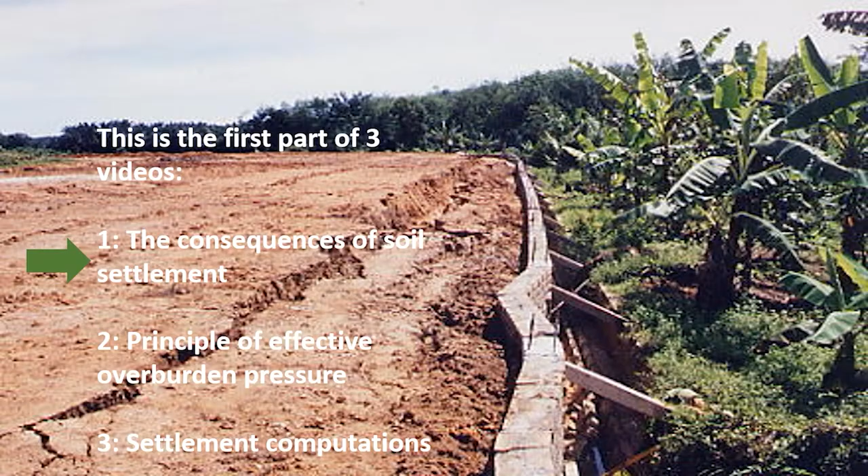This is the first part of a three-part video on consolidation and settlement. The first part will be the consequences of soil settlement. The topic for this time will be consolidation and settlement and its effect on constructed facilities.

Okay, this is how consolidation could affect constructed facilities. On top, I think you have seen this before. You can see this gap here from the wall. This is the grass here. It was originally at this level, right? The grass was here. Now it has already dropped down about 200 mm below. So that is because of the settlement, and then it exposed this portion here.

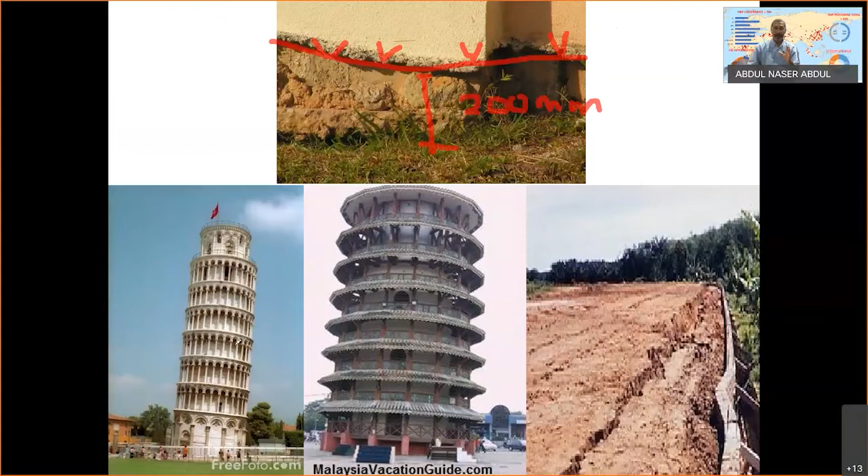And of course, this is a very famous building here. Everyone in soil or geotechnical engineering would know this. But interestingly, this Leaning Tower of Pisa, we in Malaysia also have one version of the leaning tower, which is this one here. This is in the state of Perak, actually in Teluk Intan. It has now also become a tourist attraction because of a similar leaning tower like the Pisa in Italy.

Also, if you look at the photo on the right, you can see the settlement. In this case, the base settlement takes place that caused this retaining wall here to collapse. You see this crack, and it collapsed down because of the settlement below. So these are some issues of how consolidation and settlement can affect our facilities, our buildings, our infrastructure, and so on. Menara Condong.

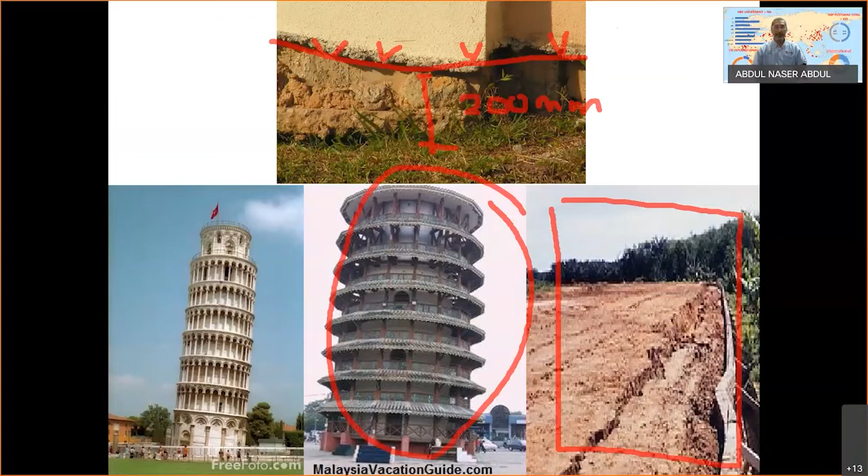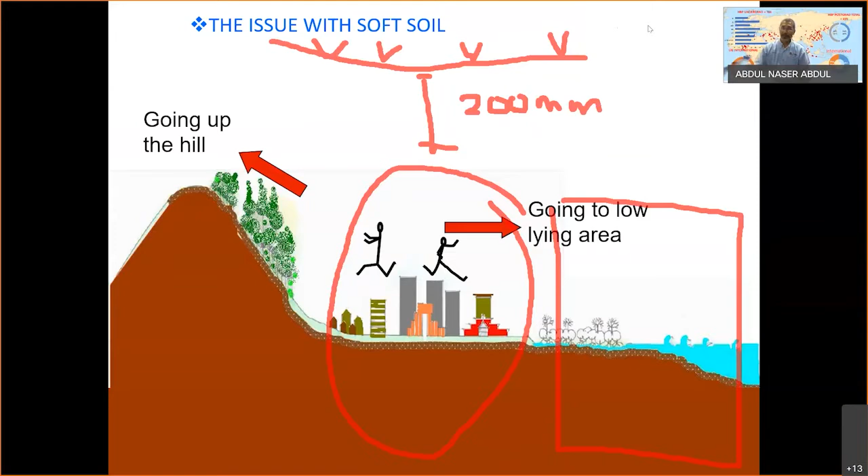And this settlement usually happens in areas with soft soil, mostly clay type of soil. If possible, we want to avoid this area. But these days, like I'm showing here, sometimes we have no option. We still need to reclaim areas with lower bearing capacity soil, because if you look at this illustration here, the good, stable landform has already been occupied by buildings. So we have no choice. We either go up the hill or we go towards the sea, even though the soil is not good in this area.

So you go towards the sea or you go towards the hill, right? Both locations, either towards the coastal area or towards the hillside, have their own geotechnical challenges. If you go towards the sea, the issues are more about soft soil settlement, and also saltwater intrusion that can cause your structures to deteriorate, and also water movement in soil that can cause flooding. If you go up the hill, you have issues such as landslide, slope stability, and sometimes problems with water supply because you are too high and you have water pressure, things like that.

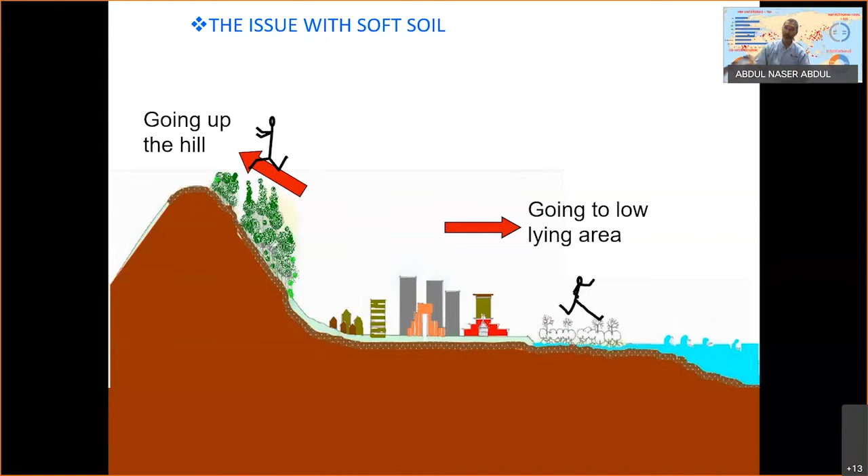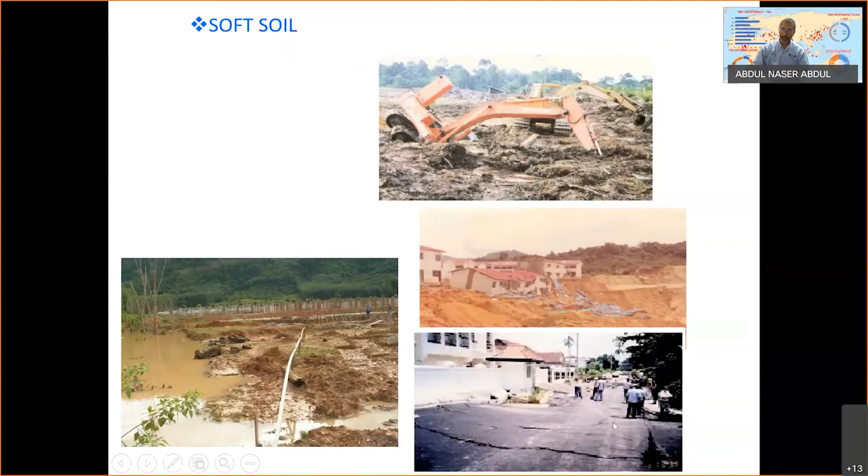Of course, we have seen this before. If we go towards low-lying swampy areas, these are the issues. Even the machine can be swallowed by the soil, and we have a flooding issue like this at the bottom here. We have subsidence like this one, and landslides that can cause buildings to collapse. And in the low-lying area towards the coast, we usually have settlement or consolidation that causes a lot of inconvenience.

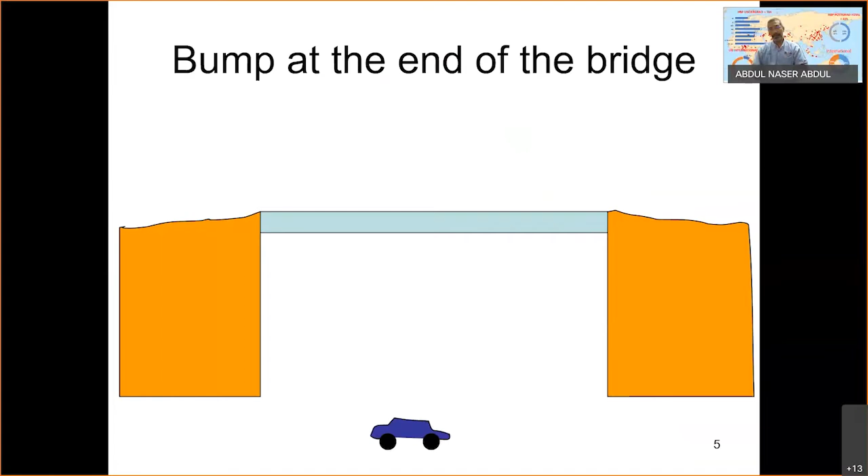For example, for road infrastructure, you are driving on a bridge and jumping up and down, because the bridge is sitting on a piling system, but the remaining soil here is sitting on the ground. This ground at the bottom will settle, and then there will be a gap here. That's why when you drive in a coastal or low-lying area, chances are you will experience this bumpy ride, like what happened to this car. But I hope no one will have this.

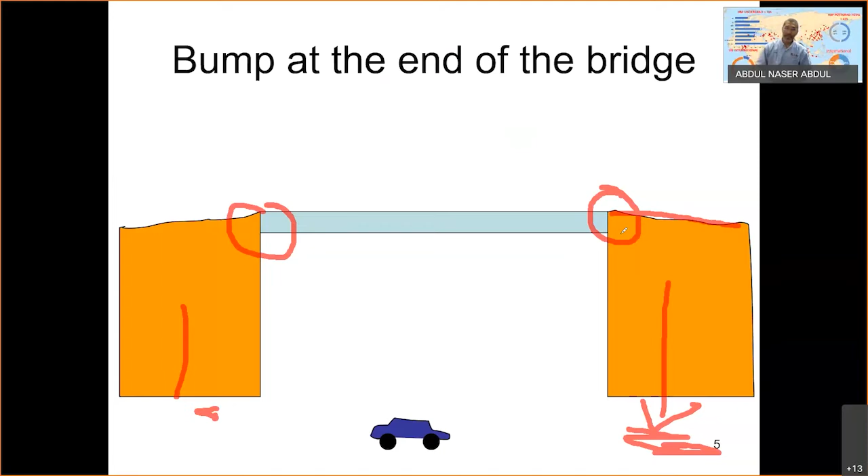No one will have to jump down the bridge like that. But there was a lot of inconvenience up until now. This problem cannot be 100% solved. What is usually done is we will top up this once there is some settlement. What we will do usually, we will try to top up again this area so that there will be a

smooth transition. But the more you top up, the heavier this area will become, and then there will be more settlement. So the settlement will keep on going if you keep adding more cover up here. So that is the situation. So these are the issues of settlement and consolidation.

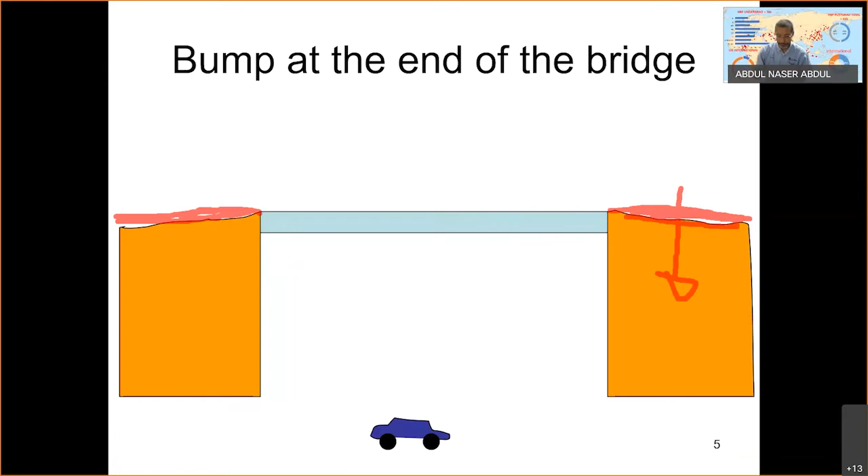So let us now go a little bit on the process that can cause settlement. Three common physical processes produce settlement in soil. First, this is what we call consolidation settlement of the soil. It is sometimes called primary consolidation. The second is

Okay, Noor is going to Salat. Okay.

The second will be what we call secondary compression. Secondary compression settlement results from particle orientation or adjustment. And the third one is distortion settlement, or lateral movement of the soil. But 90% of the time, 90% of the settlement comes from number one, which is the consolidation settlement.

The secondary compression will be a little, or can happen very quickly, especially if you are talking about sand. And distortion settlement depends on how the loading is applied to the soil. But most of the time, 90% of the time, the primary consolidation is the one that produces the major portion of the settlement.

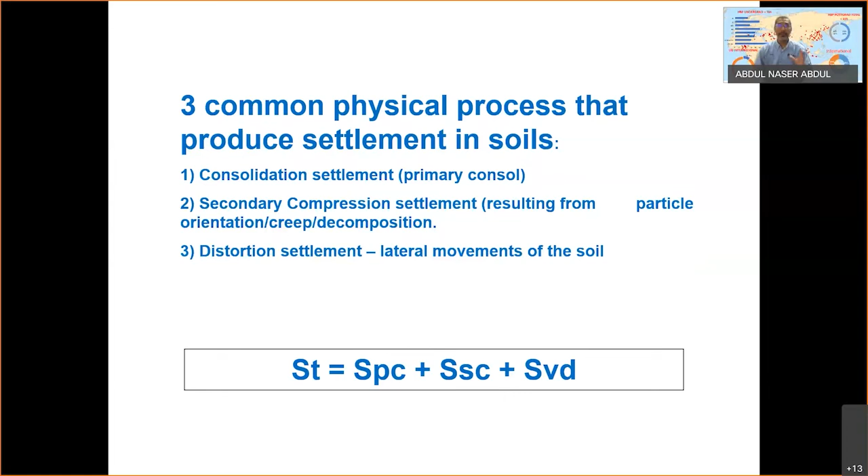Just to recall again the difference between consolidation and compaction. Remember last week we talked about compaction, and this time we talk about consolidation. Consolidation is we try to remove water from the soil. Compaction, we remove air. So that's the difference.

That is why in the low-lying area the soil is always underwater, or there will be a higher moisture content. So once we remove the water from the soil, the volume will be smaller, but at the same time it will also become stronger because of the consolidation.

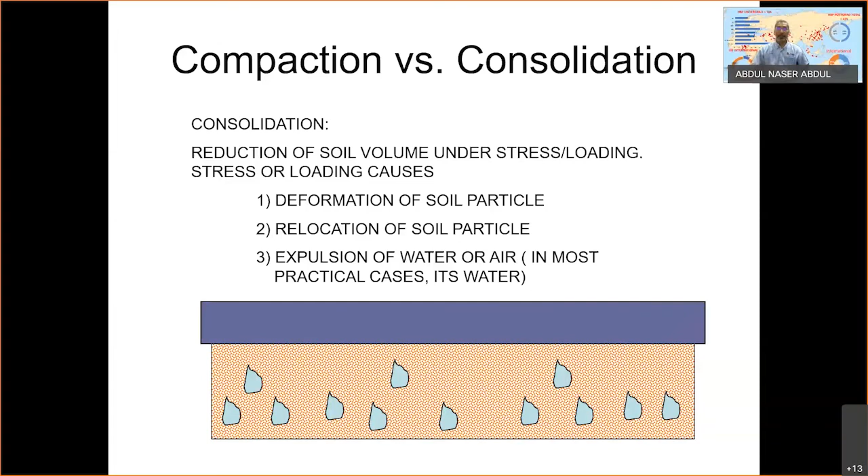Distortion settlement is, like I said before, lateral deformation that takes place when heavy loads are applied over a small area. This is usually an issue for individual structures or buildings. But when you talk about overall settlement, we're talking about a large area of settlement that is caused by primary consolidation.

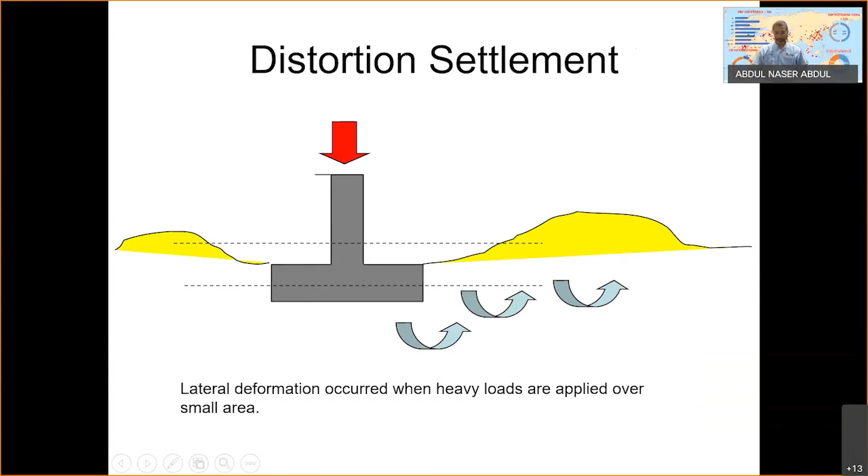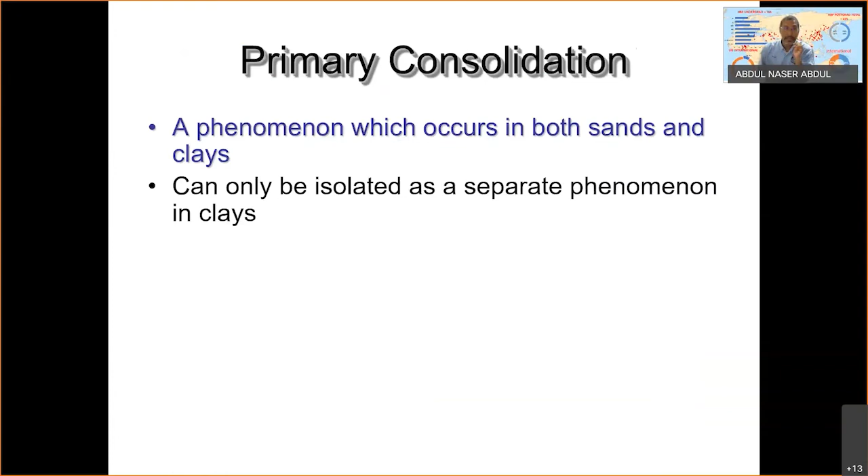Like I said before, the primary consolidation is the one that usually creates the major portion of the total settlement, or 90%. Primary consolidation is a phenomenon that happens for both sand and clay, but can only be isolated as a separate phenomenon in clays, because in sand it can happen quickly. It will not take a long time. What happens is expulsion of water from soil, accompanied by an increase in effective stress and strength.

If you ask whether consolidation or settlement is good or bad, it is good if the consolidation or settlement has already taken place when you start the project. It's going to be bad if you start your project before the settlement and consolidation take place. It will cause collapse or crack your building. But if you let them consolidate first, then start your building, you'll be okay.

That's what we do in the field. If we foresee that the soil will settle under the building, road or whatever structure we propose to build, we want it to be consolidated first. We want the settlement to take place before we start our project.

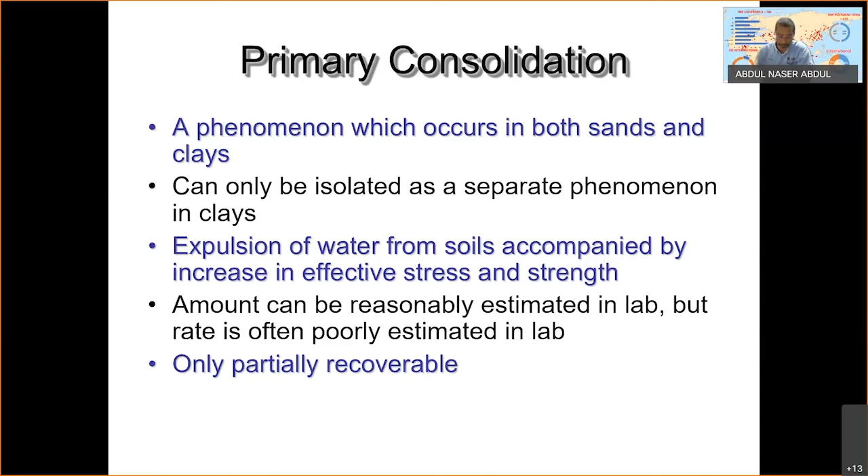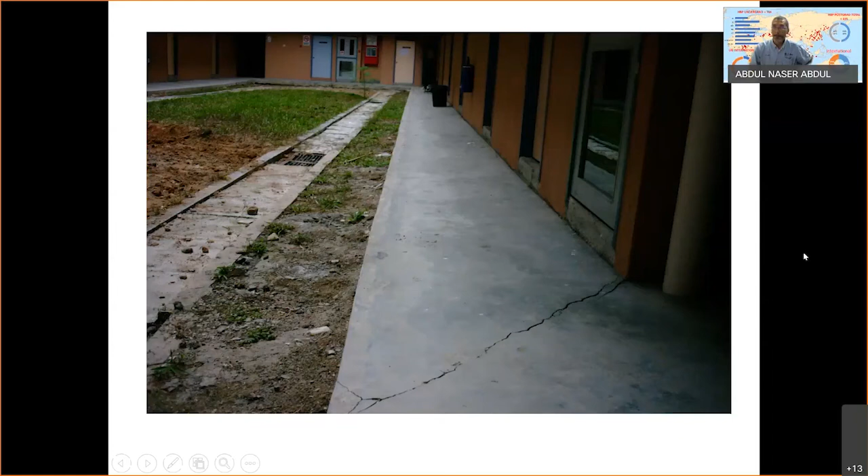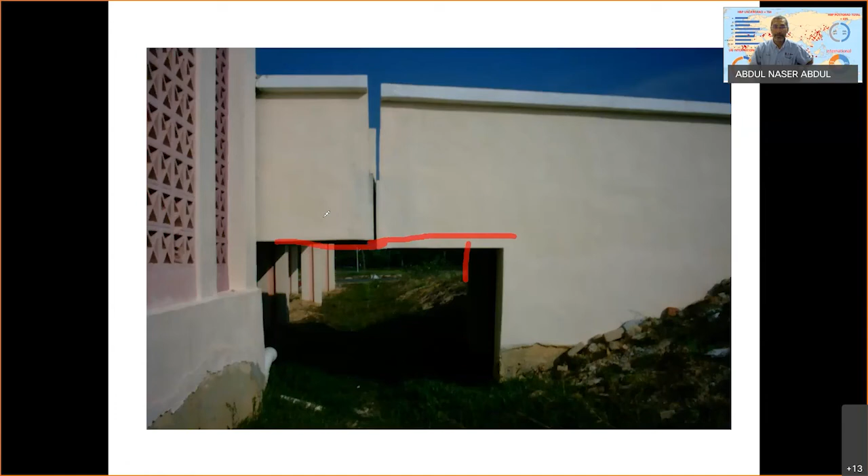Of course, you can see the difference between these two portions of the structure here. One is slightly higher than the other. Originally, they were the same level. Now one is coming down, the other not going up, but one is higher than the other. This happened because this portion here is sitting on the ground, but this portion, including the building, is sitting on piles. Piles transfer the loading to the stronger soil, but this portion is not on piles. It's just a small structure connecting the footbridge to this building.

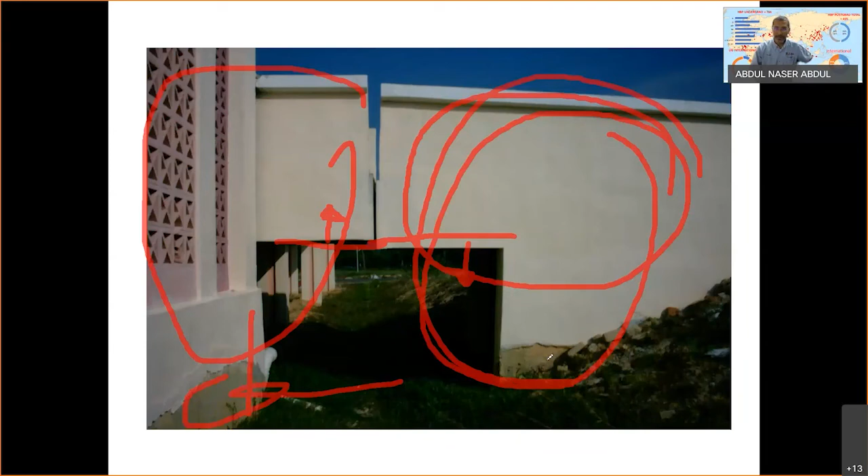At the same time, you can also see this marking down here. There is already soil settlement. The soil settled, and that means this structure has moved down. Not only the soil moved down, the structure also went down together with the soil, but by a different amount; you can see the soil dropped more than the structure. So this is what happens when we do not make sure the settlement or consolidation takes place before we put the structure at this place.

See, again here to show the difference. There will be differential settlement, right? These kinds of issues can be solved if you make sure the soil settles first. But of course, it depends on the type of soil for us to know how much time it needs. We need to make sure it settles first.

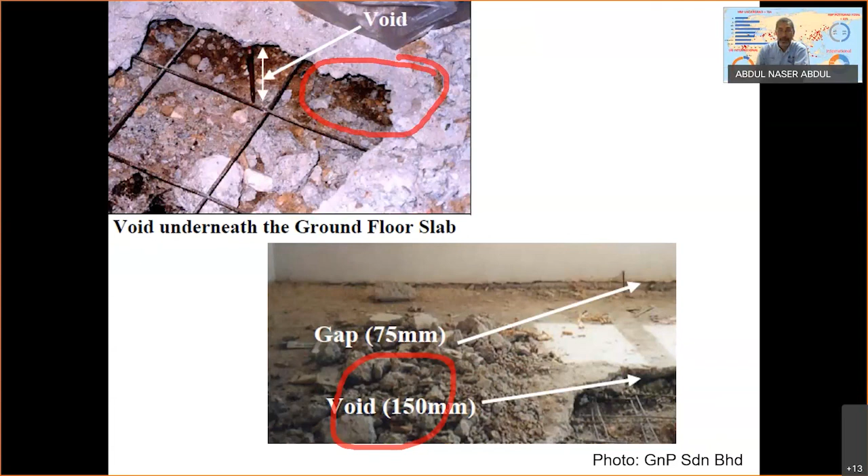Okay, again, this is just to show this. See, this is a gap here. You can see the gap, or more gap here, because of settlement. See this building here. This building is on piles, so it doesn't go down. But this soil and drain here are on their own on the soil. So when the soil settles, everything goes down, and it creates the gap.

It creates the gap here, and of course it is not a matter of structural integrity, but it will cause other problems. The structure will not fail, but gaps like this will let snakes stay inside, for example, or rats multiply, things like that. Of course, when there are rats, there will be snakes. So you don't want that to happen.

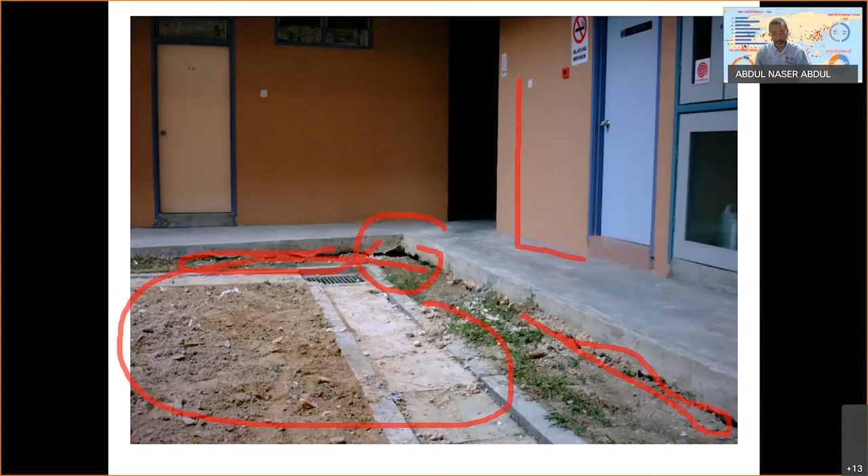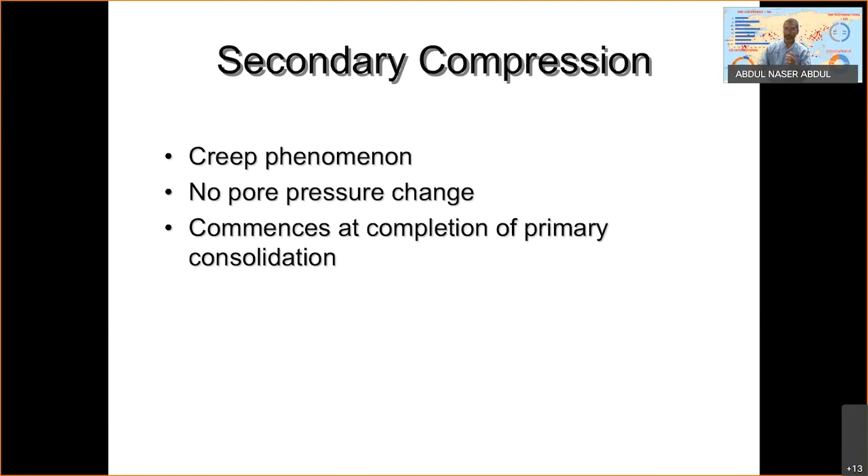Okay, and now a little bit on secondary compression. Like I said before, this is the adjustment of the material. No pore pressure change. Only after completion of primary consolidation. It can happen fast if the material is sand, but it will wait a lot more time if the material is clay, because it requires primary consolidation to take place first. Primary consolidation for sand can be very quick, but for clay it will take very long.